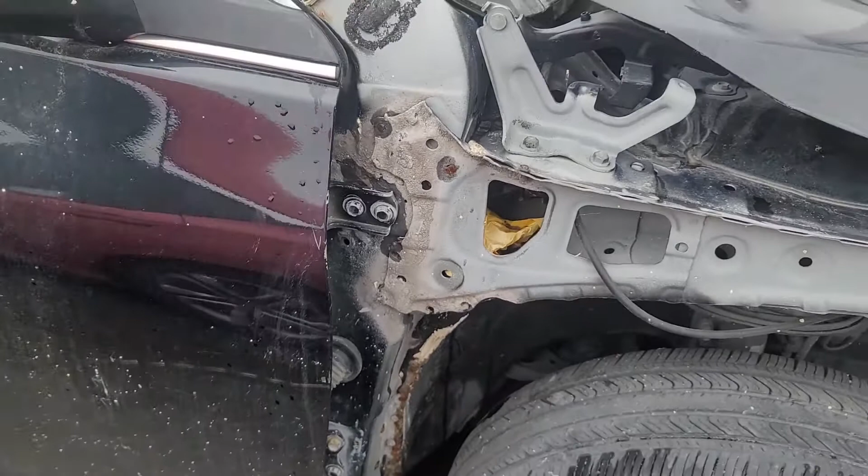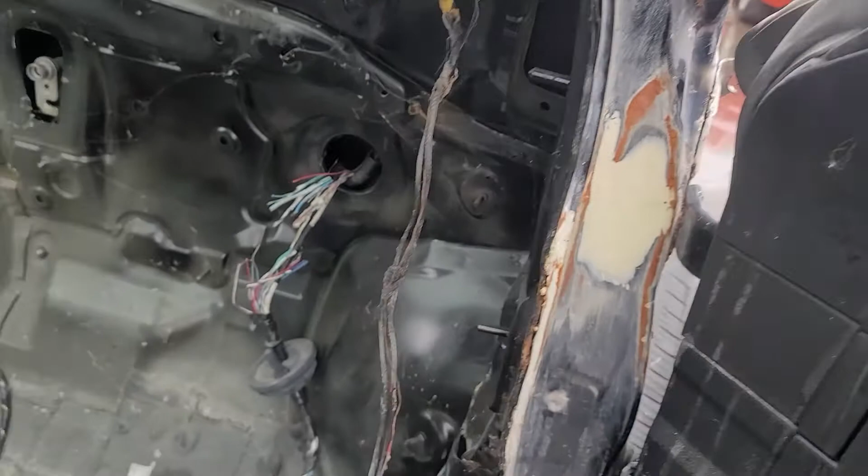Story behind this vehicle is it's a customer's car. It was sitting here for some body repair, and I'm not sure about what they did. They put filling, blah blah blah, and so they started welding, and all of a sudden the guy is welding. He did not notice that there is a fire inside the vehicle on this side. So what the fire did, it damaged the dashboard. It was under the glove box behind it, and it damaged the wiring harness. And we are here to repair the wiring harness.

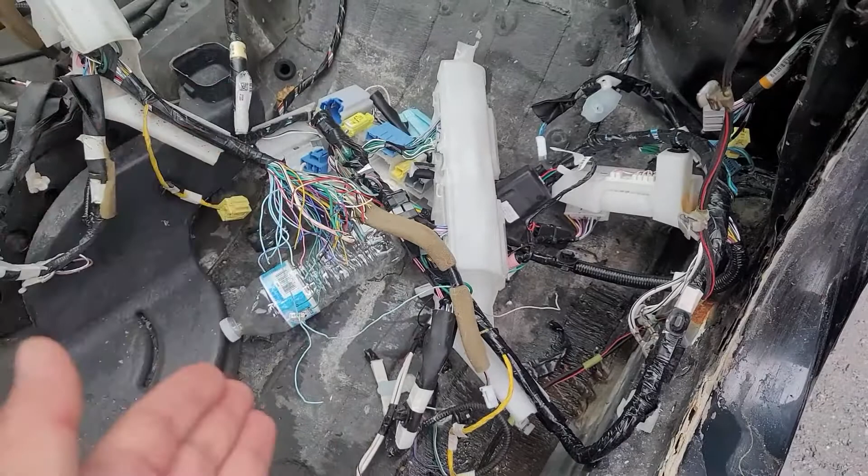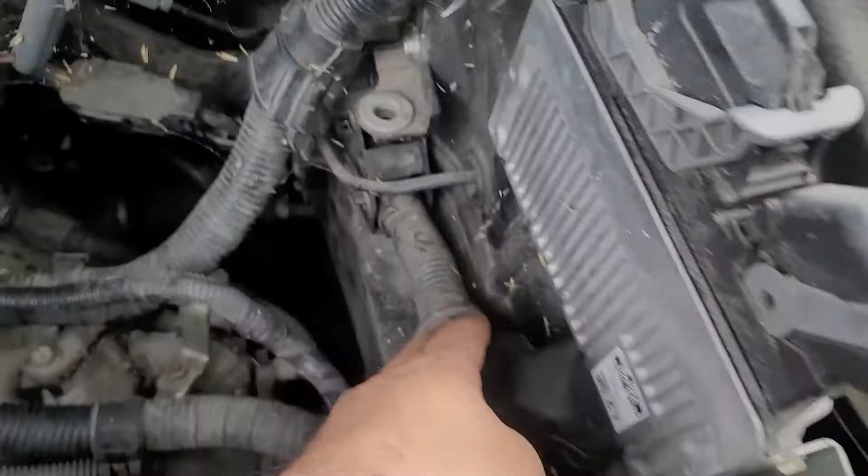They got this from the junkyard, but unfortunately when they got it, they also cut it. All they could have done is they bring the whole thing from under the fuse box here, and then goes over there and comes inside the vehicle from here and goes under behind the blower motor and all of that, and to the dashboard. But unfortunately he cut it, and he realized after that he did a mistake.

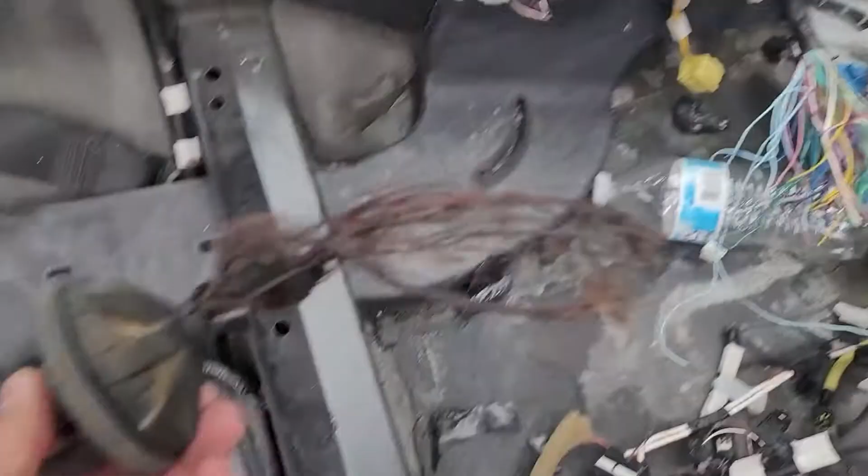It's not easy to find. It's a 16 and 17 only for some reason, and yeah. So this is the old one. See how it was. So we're going to fix this.

So I will share with you guys. I know this is really a boring job, but I will share with you guys how I'm going to do it, just in case one day you guys want to do it. And don't get me wrong, the payment is still good, but it's not gonna be compensating for the time. But again, this is still a job.

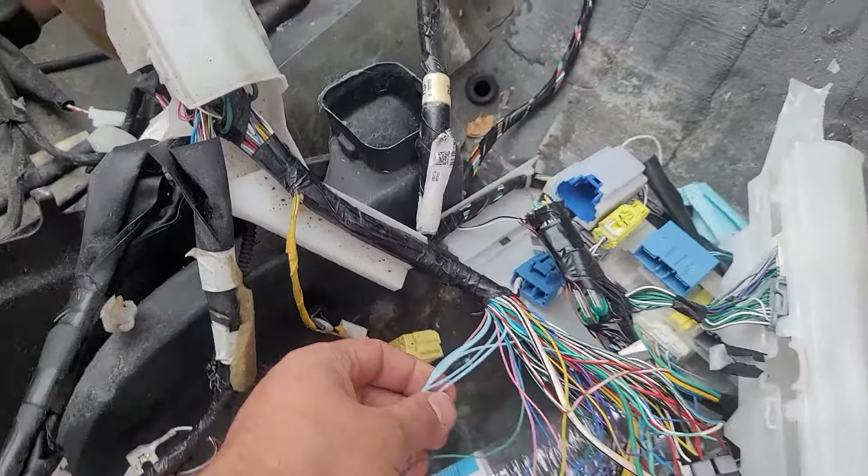I haven't done a job as big as this before, and if you think it's easy, no, it's not easy. For example, right here we have 2, 4, about 7 wires, the same color, same gauge, same everything. How do you know which one of these goes to the corresponding ones on this side? You don't. Same thing with reds and browns and blues. So it's not easy. It's definitely not easy to do, but I will do it.

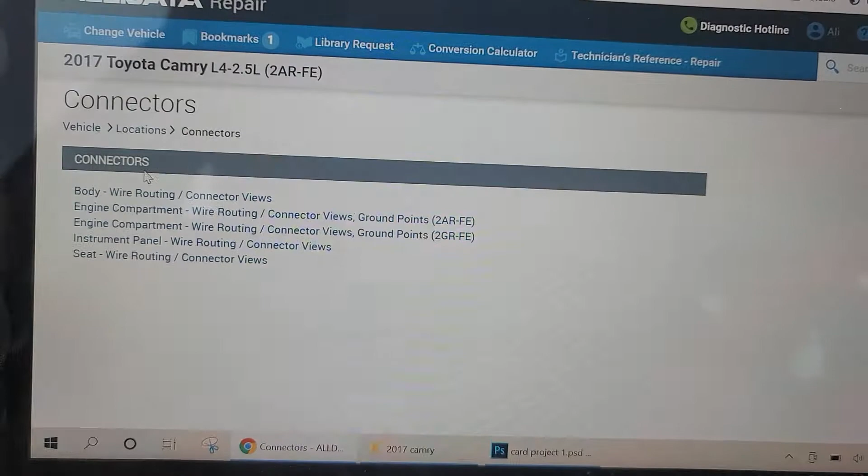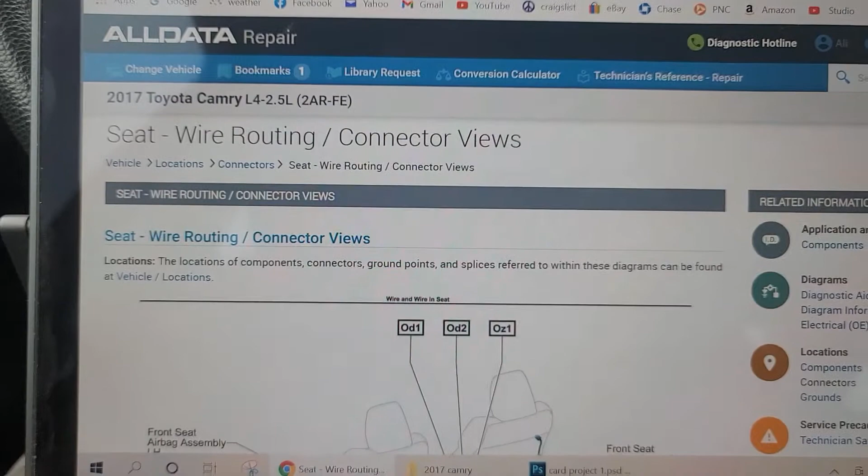My next step is I went to AllData and I went to connectors. So I started clicking on, let's say, the body, and I saved all these pages as PDF to print them. I am going to print all these connectors, routing, numbers and views, and take them with me inside the car, because I'm definitely gonna use them when I check continuity between 2 points to determine which wire goes to which.

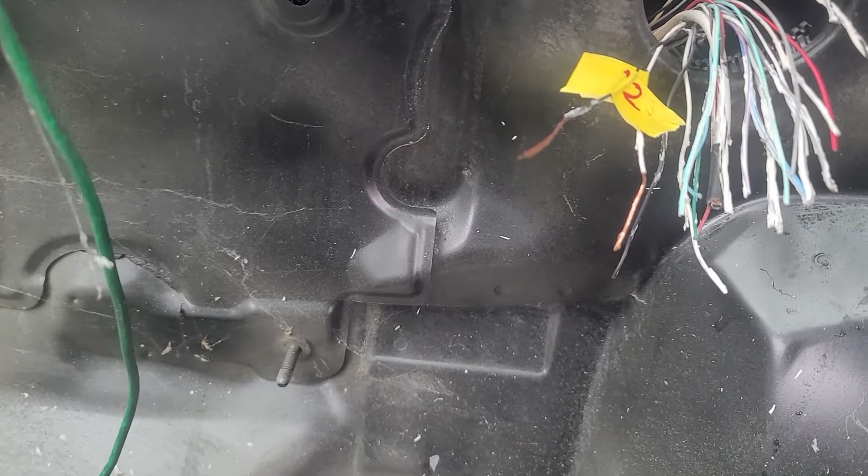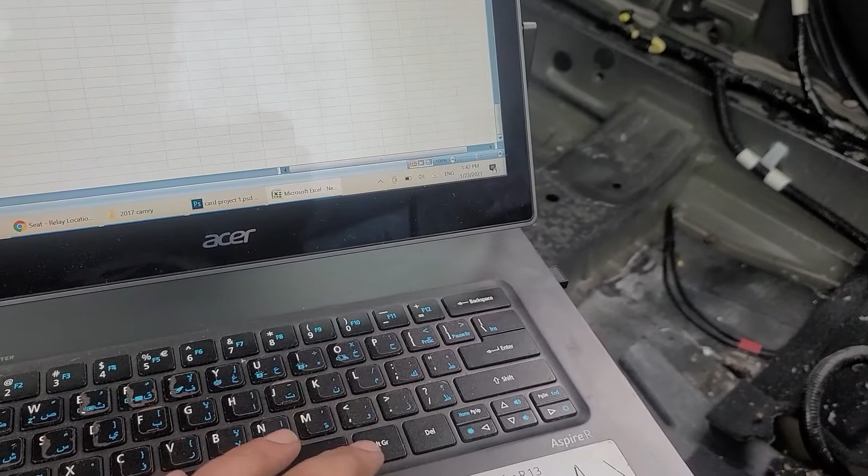Well, next we have to come inside the car, and what I did in the computer, I created an Excel sheet, and for now I'm using these columns: label number, color, start location, end location. So the label number is going to be a label I give to these wires. I use some masking tape with a marker and I label them.

Let's say this one is going to be label number 1, color white. Start location, that's when I'm going to use my ohm meter on continuity, and I'm going to hook this right here, and I'm going to go to the fuse box, and on the fuse box I'm going to check this line, where does it go to, which fuse, and by finding that fuse I go back to the computer, pull up the wiring diagram, see where this end should go to.

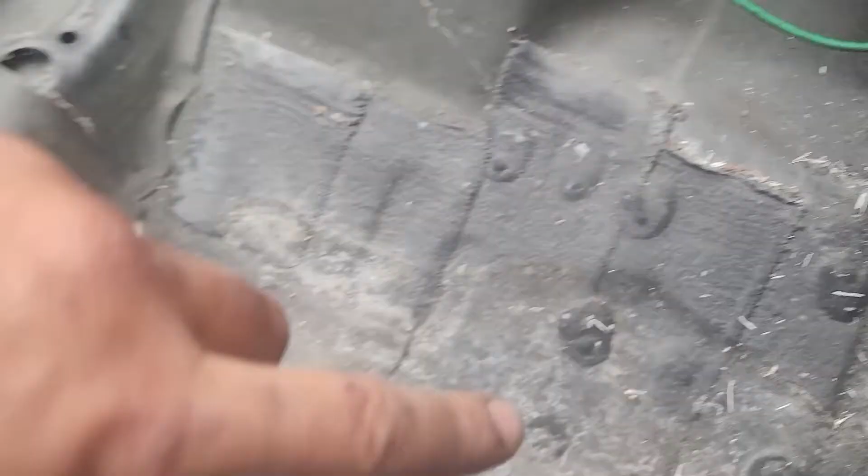So from here to... actually from here to... where's that piece? Right here. So from here to here, and it should go right to one of these harnesses that we already pulled the pin out for them, and I'm going to print and bring with me here in the car for faster access, faster checking.

Here's something that I learned today, and it was really helpful for me. You see how these wires are twisted? So when it's twisted, there's an indication that they might go to the same location.

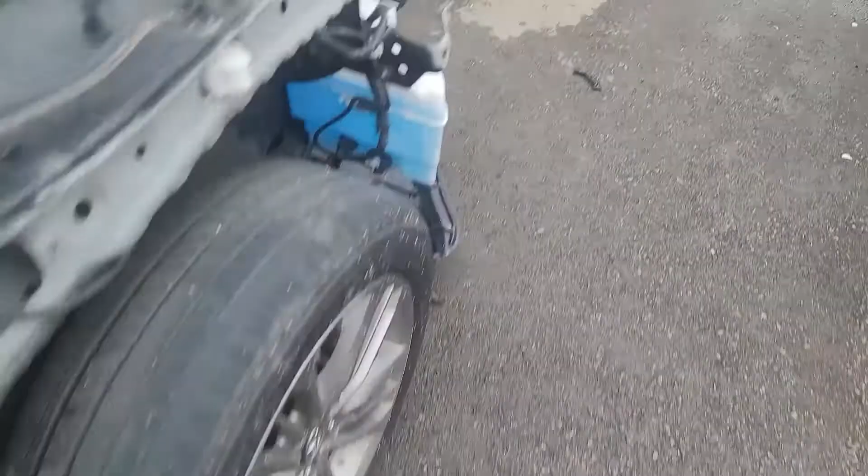So I was gonna use this, and let's start with 1. Now what I did, I went over there, and I took this off, took the bottom off out of the way to have a better access to these wires. So basically these 2 harnesses, one for the engine, the big one is for the engine, and the small one is the one that goes to the car.

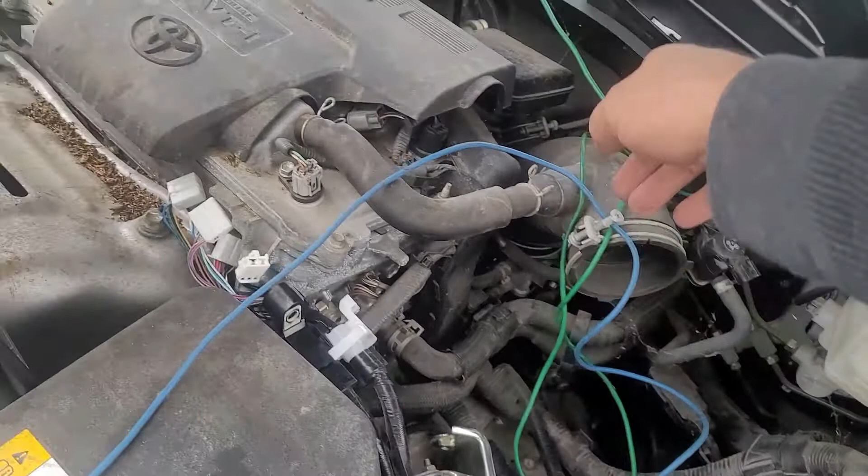At the same time, these wires, they go from the fuse box, they go this way, they branch to inside the car from here, and they branch in there, and some of them go over there.

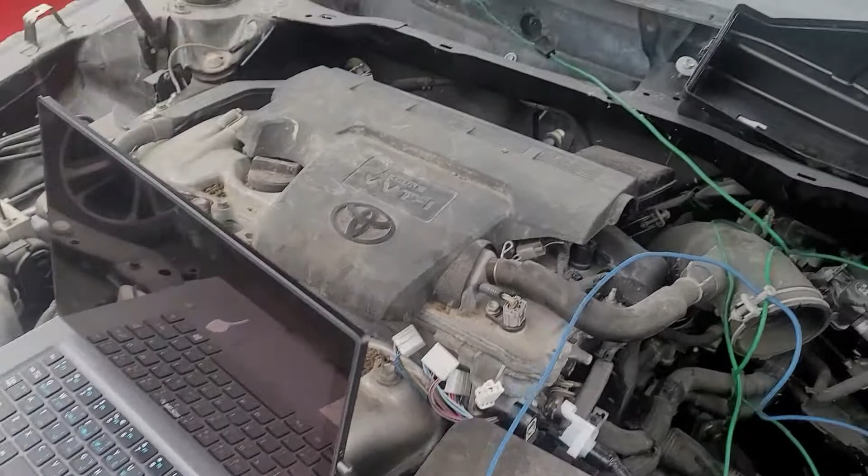Now looking at these black and white twisted wires, what could be coming from the car to the outside, to the inside, sorry. But what happened is, look, I found them here, twisted, but I checked every white wire here, I couldn't find anything. It was crazy, I couldn't find anything.

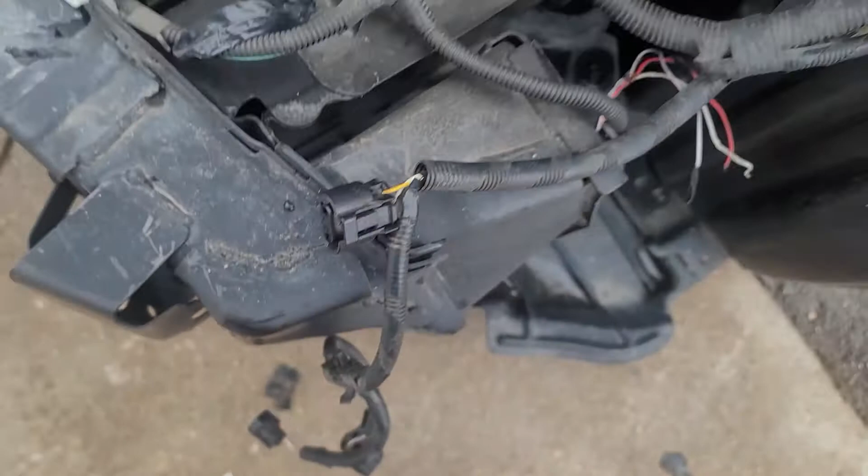But what I noticed, some of these wires, they go straight here outside, and they branch also here, so that makes my life with this car worse. And then I thought about it, I'm like, okay, what could be coming from inside the car straight to the outside without going to the fuse box or to the computer?

And I couldn't think of anything other than the airbag. So I went to the computer and I pulled the airbag diagram. And guess what? They are black and white, black and white. And these are the front airbag sensor, front airbag, left and right.

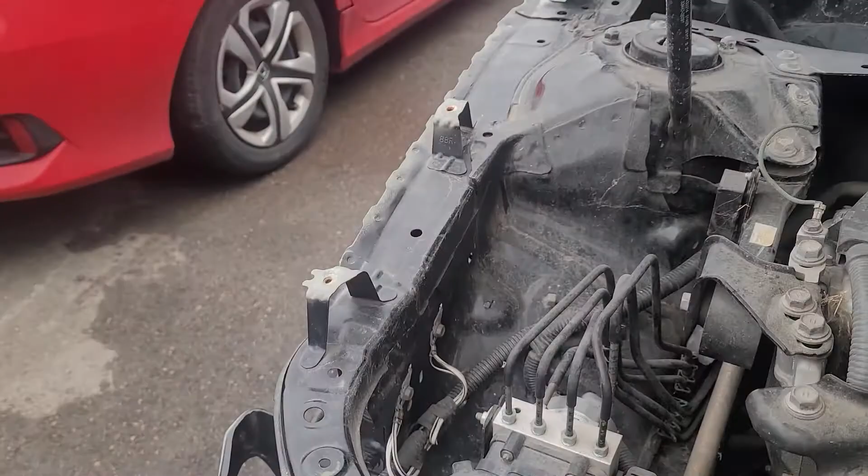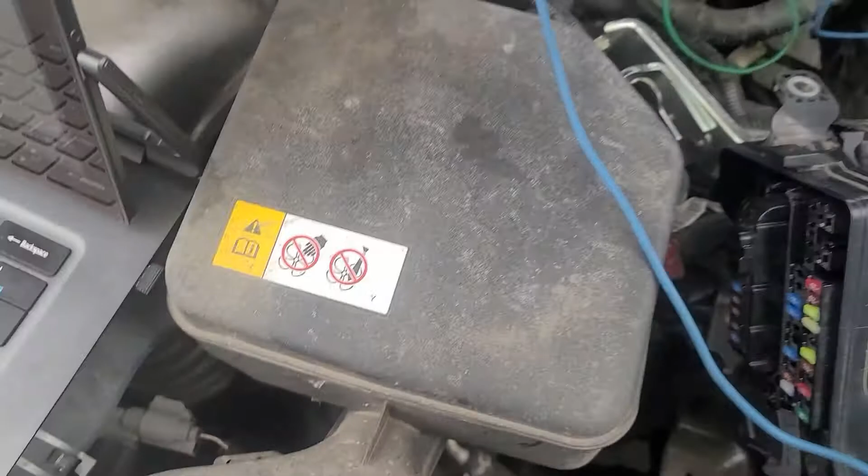So what I did, I came with my probe and I disconnected this and I checked here and I didn't have no signal, which this one is the same one that come here. But I was like, okay, then how about the other side, the passenger? I don't see any wire come from here, so it gotta be the one that branches from there and come in here, come into this.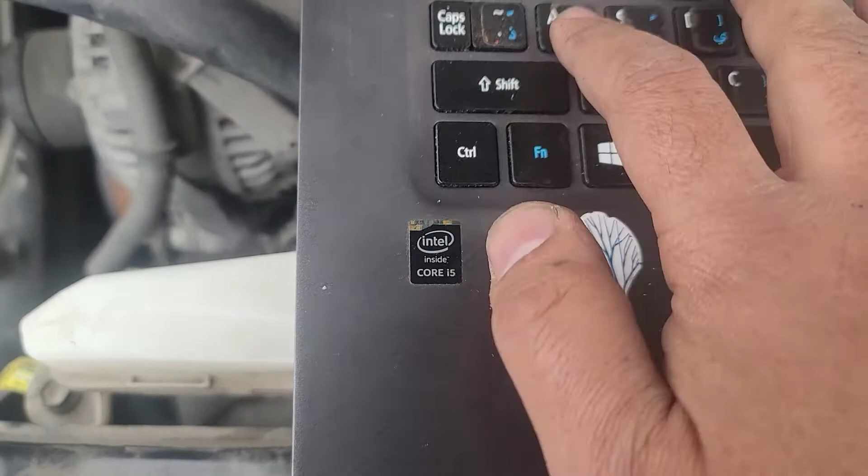Label number 1, color white. Start location, it depends on how you look at it, but for me, I'm gonna look at it outside to inside always. And start location is right hand crash sensor. End location, so right hand crash sensor, that's right here.

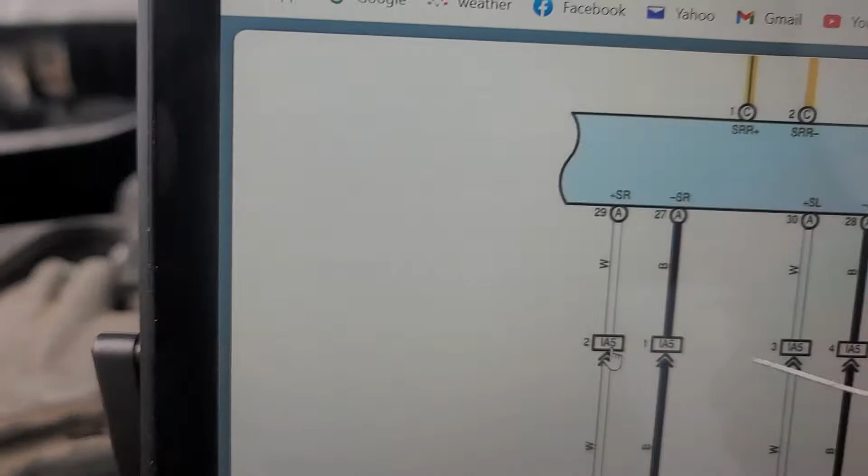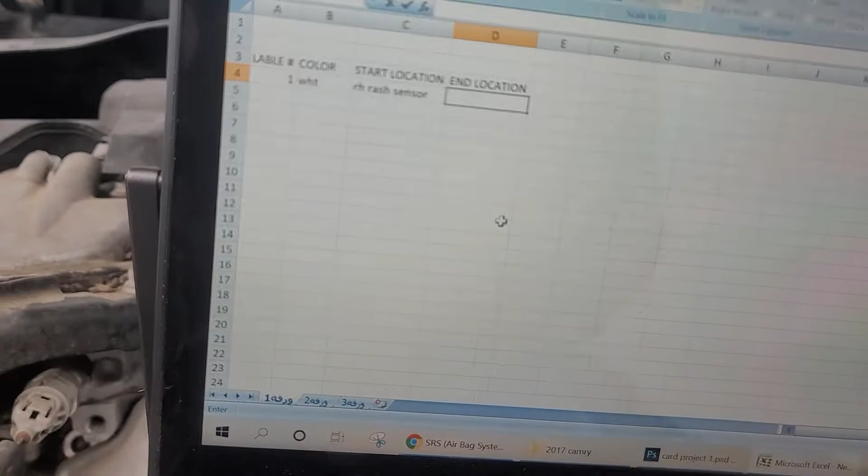Black one, sorry, the white one would be pin number 2 going to this connector right here. This is really important, I looked at it earlier. IA5 pin number 2. I'm gonna say IA5 pin 2 right here. CIA5 pin 2.

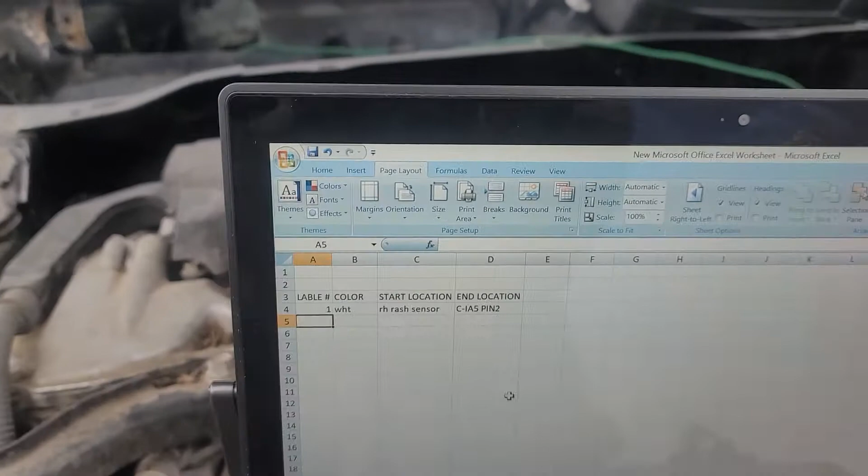Second was black one, black right hand sensor, C pin number 1, I think. Definitely is pin number 1, right? Yes, pin number 1.

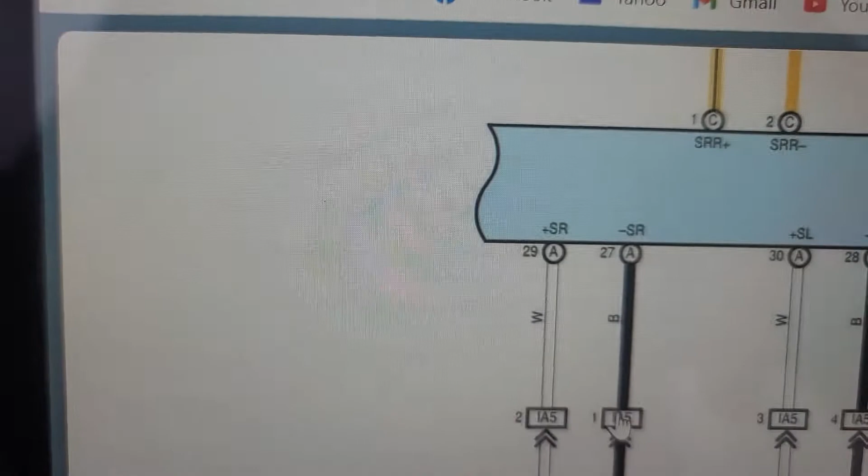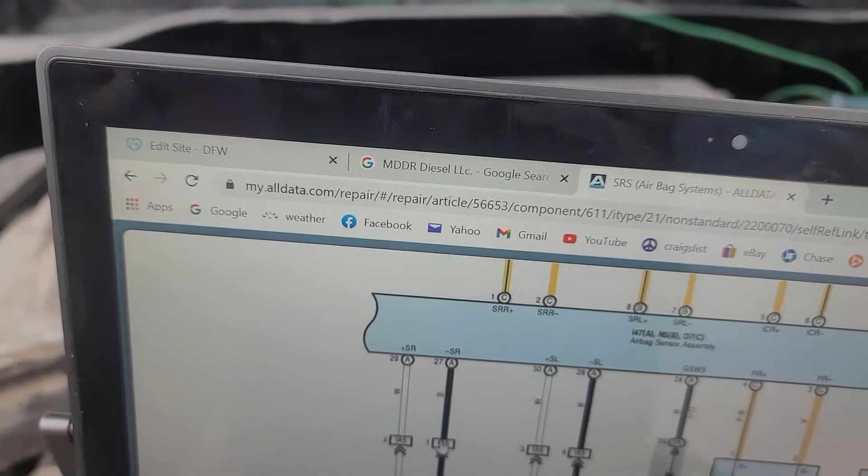Now I'm thinking of adding another column so I can add the final destination, because remember we have 2 cuts. So some of them are going to be already good, but others, I think if I'm not mistaken, I think this goes to here and this goes all of it. You know what, I don't think I need to. Well, I have the diagram out anyway. I don't want to go back to them again, but this comes to this junction right here. IA5 is going to be one of these, and then from here I will branch to this big one right here that's going to be connected to this end.

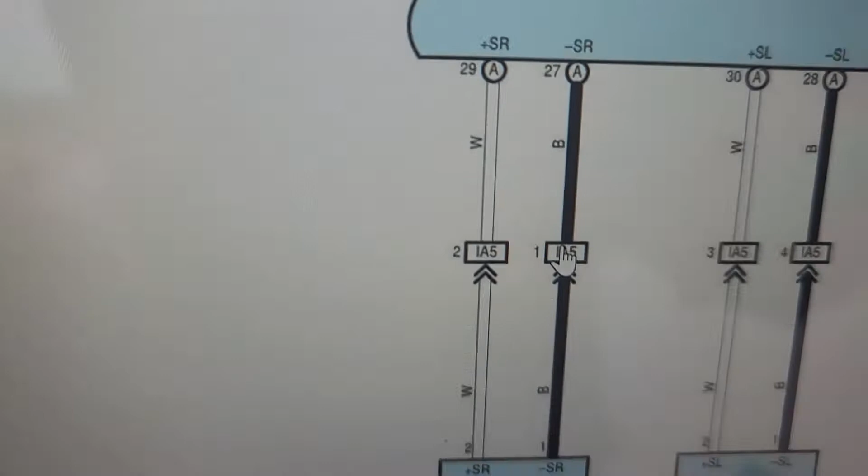So yeah, let me put it. It's going to make my job easier. And from IA5 is going to... but here's the problem. When it says here, I don't know which one of these connectors, airbag connectors, this will be.

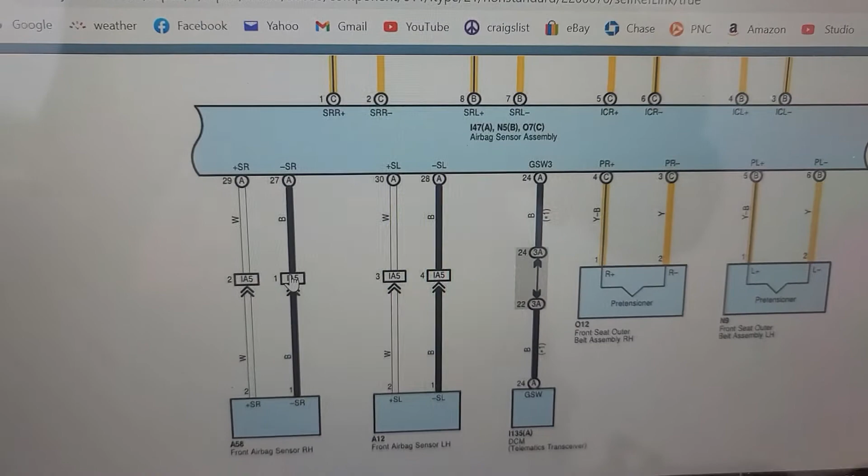Should I write which diagram I found it when I go back to it? I don't know, we'll see. But this is basically how I'm going to do things.

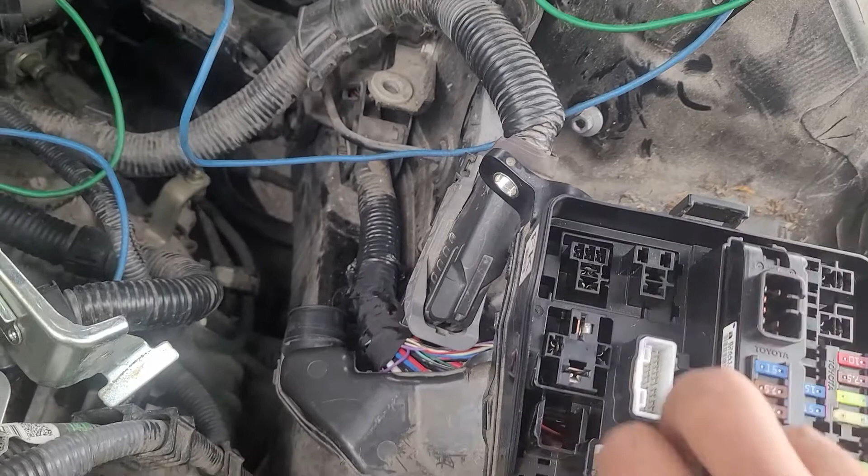That number 1 drove me crazy, because what I did, I checked these, I opened the relays, checked the pins, the harnesses, I took them off, I checked the harness for the computer, nothing. And I checked, that's when I decided to open this here, and I opened it, I checked all these black and white, and nothing. But hey, you learn something every day, and this is how I learned it, the hard way, but it's gonna stick forever.

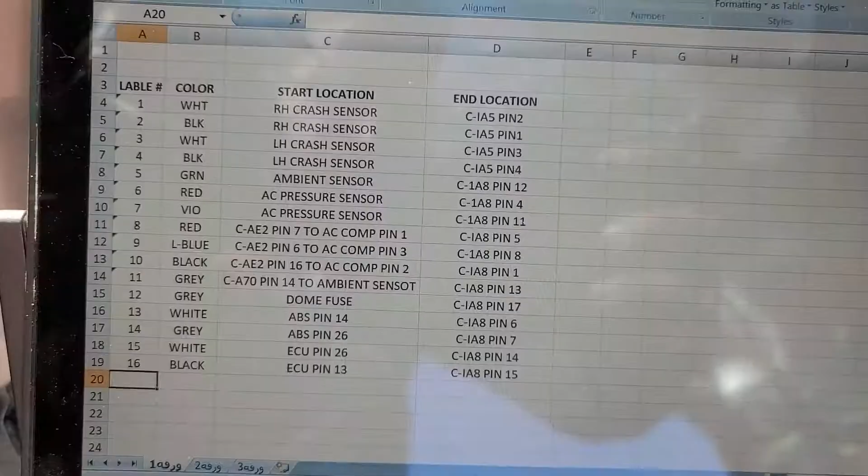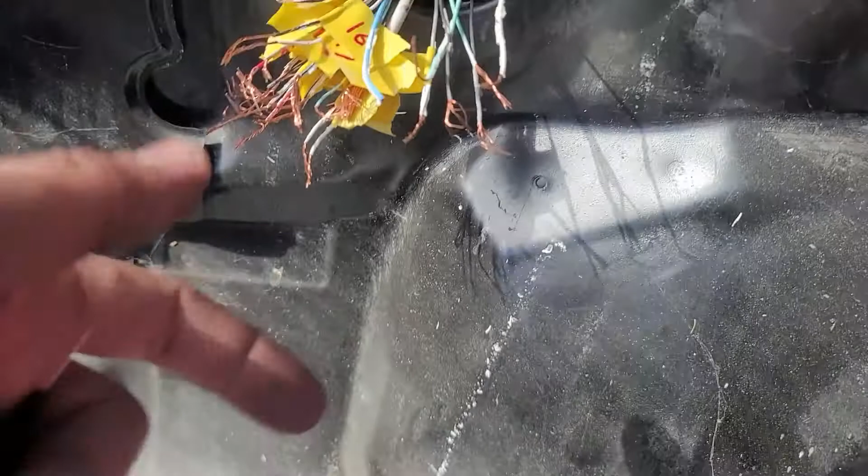Well, just to get you guys with me, I'm almost done with this first piece, and so far I got 16 of the most common ones. I am left with these two light blue, one gray, one white, and one black. All I can do is when I have the extra ones on this side, I will find out where they go to here in this harness, and then I'll be able to pull up the wiring diagram for them.

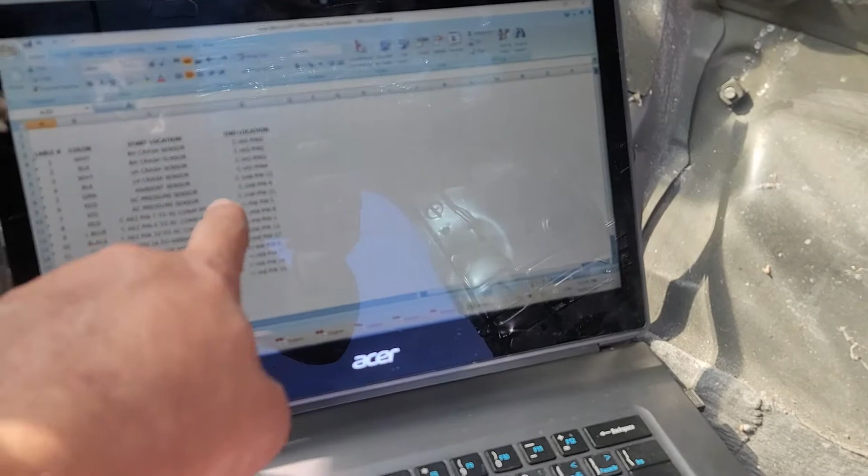Because here I'm limited. Over there by the engine there's a lot of components, the ECU, the ABS, the lights, the sensors, the airbag sensors, although I checked most of these major circuits, but yeah, I forgot to do it this way is better. So every time I finish one, I label it, write what it is, where it's going to, what's the other pin. So what I'm going to do right now, I'm gonna go one by one.

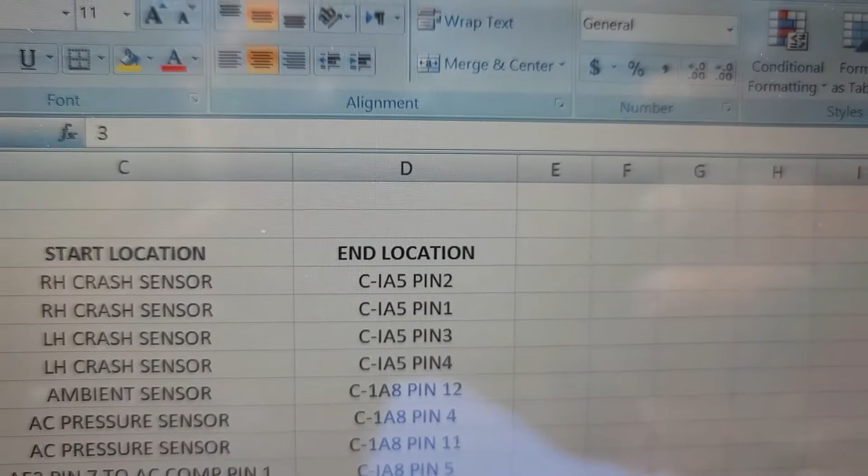Pin number 1, I'm gonna find out C1, connector IA5, pin 2, and when I find it here, I find out the corresponding wire here, and I connect it to number 1. That's how it's gonna be.

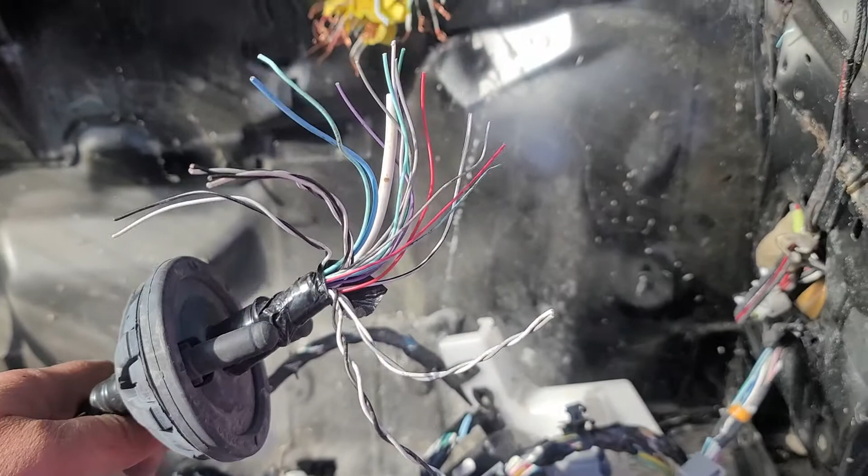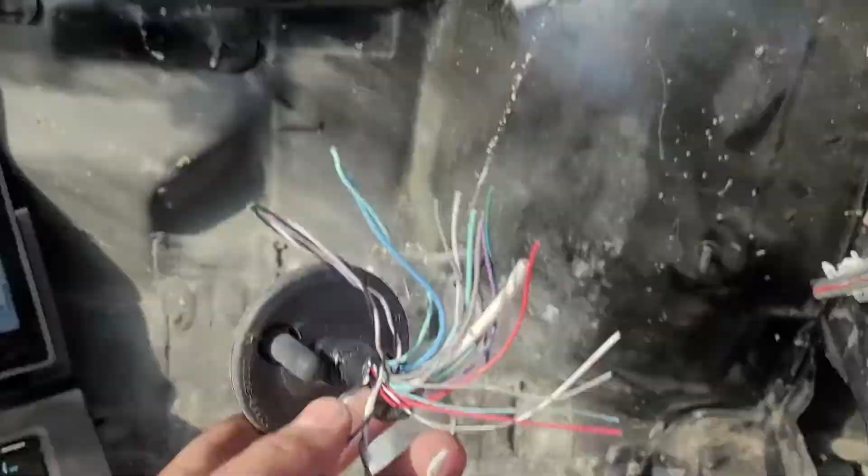So here I'm dealing with the two harnesses. This is the IA8, this is IA5. I have 4 here, and the rest are all of them here. So I'm going to check continuity between these pins with this end, and then decide which one goes to which based on my diagram. You guys can take screenshots or something if interested.

We are done with this harness, and now we're going to move to part 2. It's gonna be fun. This is a bigger one, and it has more common colors and more harnesses here to deal with, so this one is gonna take me longer than this one took me.

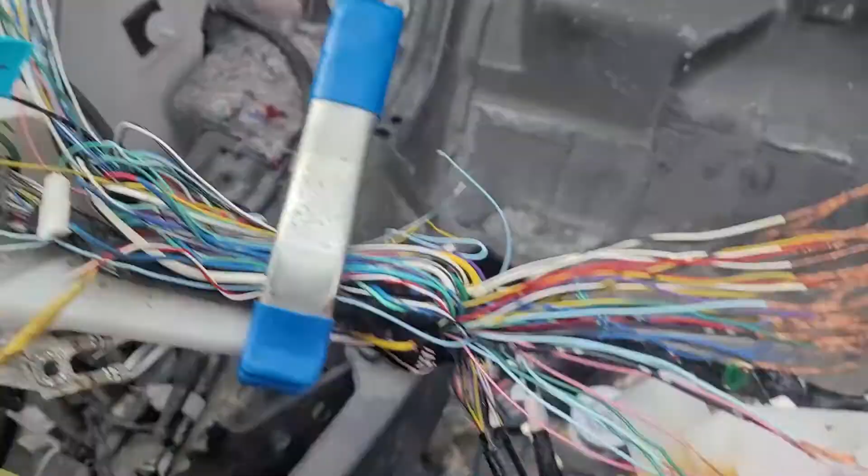I want to share with you guys the technique that I'm gonna use for this harness. I chose one wire. Again, using the ohm meter continuity, I hooked up one lead here, and I started searching for the same color, and I found it in that harness.

So from that harness number, which I actually traced on the other end, I went to the passenger rear door. So I went to the computer, and I pulled up the passenger rear door, and I found out that that black wire is coming to this harness, which is IO2, and I labeled it, and it goes to the junction box on the driver's side to a harness B.

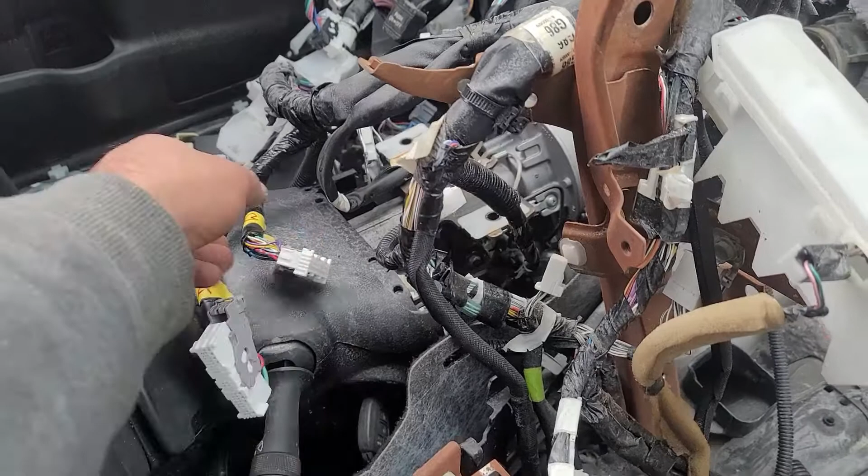I pulled that wiring diagram, and I found out the harness, and from here, from the known good pin here, I am going to know which is the wire corresponding to that pin over there, which is going to be the same one.

I'm not gonna wire them right yet because they want to put some stuff. They said they had to install a couple of pieces before I'd be able to do my thing. But so what I did here, I used the logic and common sense.

Like what? The wires that don't have similar gauge or color. Yeah, the wires that don't share same gauge or color, I fold them and I put them here for later. It's gonna be easier to do, but I'm more concerned about these that are the same thickness and the exact same color.

Those are the ones that I'm gonna be careful with. The other ones are gonna be easier to find because they are unique, one of a kind, either because of the gauge, the trace on them, or the color itself. So that's how I'm gonna do it.

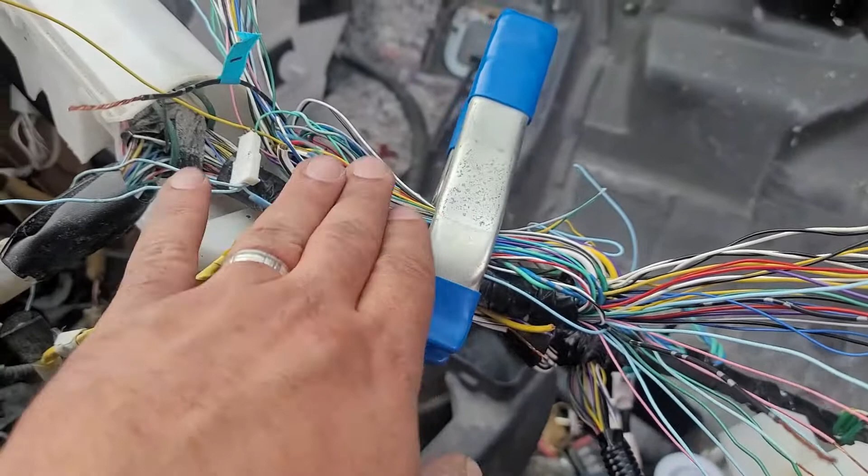I'm gonna focus on these first, and then switch to the other ones. And I think when I find the harnesses and label all of them where they go to, it's gonna make it way easier to find these ones right here.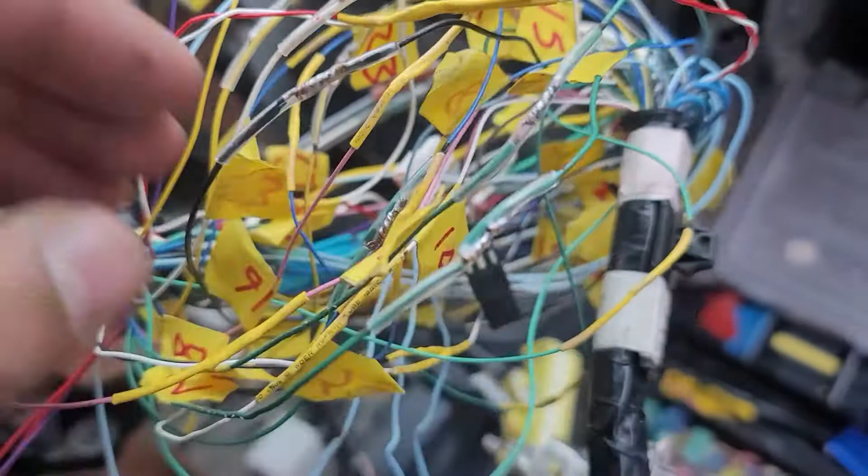Alright, I'm almost done with this harness, this side. What I did, for the big ones, I used these connectors, and I'm gonna tape them. For the most common ones, I use this clear shrink, because it's thicker than the black one that I have.

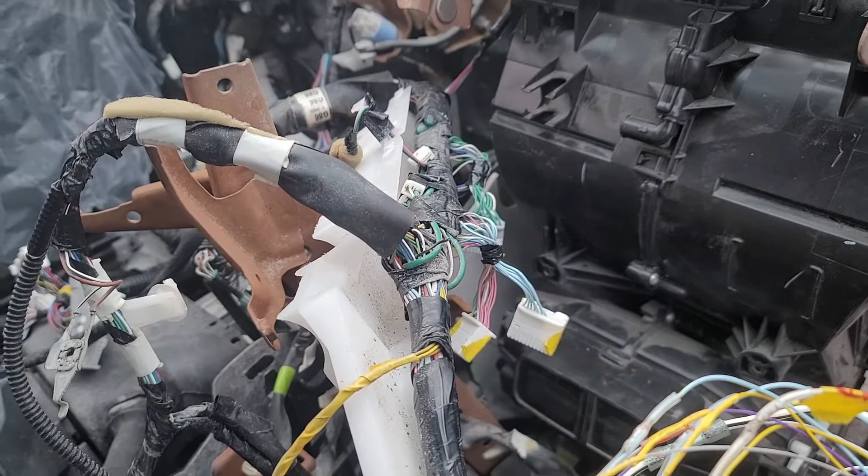What we're gonna do is hook everything up before we put the dashboard back, give it a key on, scan the car, delete everything, cycle the key, and see if we have any codes or cut wires we need to fix. It's easier to do it while it's like that, after we make sure everything is properly hooked up and no fuses are blown. Then I'll give the okay to put everything together. But this is how we're gonna do it.

I'm left with 4 wires on the original side, dead at the other end, because when they brought this harness, it didn't have those wires. So I came to the old one - this is the brand new one, that's why it's good to always have it.

Let's say, for example, this green one, the thick one - I traced it and it comes to this harness. So this harness, the original one, clips to this original one. And if you see, this is the pin right here, but on the other end it doesn't have a wire. That means this is dead.

So what I did, I just crimped it right here. The other one's the same thing. I use this just in case me or somebody in the future needs them, so I have them and can shove whatever wire I want and crimp it. For the smaller ones, I use this yellow shrink because I don't have a clear one, and I didn't want to use this thick big one because it would not fit correctly.

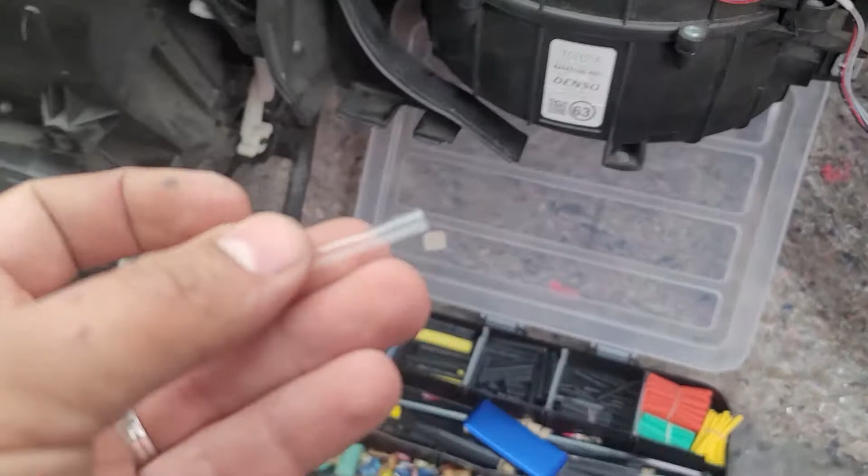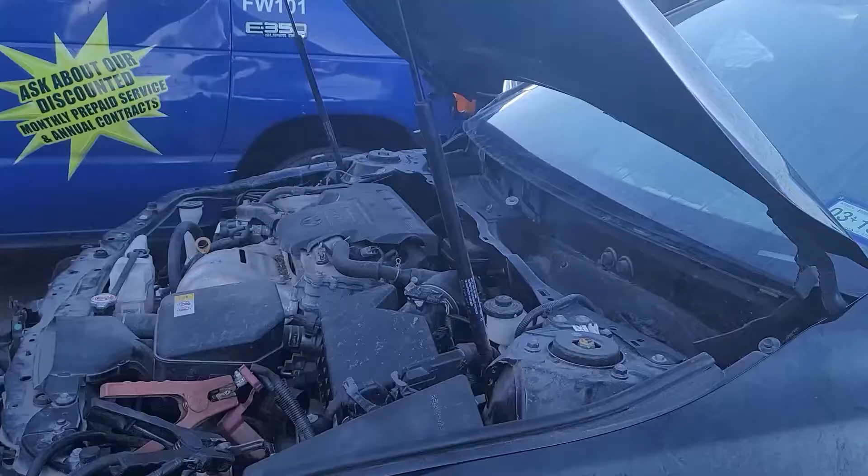So after we make sure everything's okay, I'm gonna tape everything together and show you guys the results. So this is the first time we start the vehicle after a year and a half of finishing the harness.

Alright, security light is off. ABS light is off. Airbag is on, of course. Brake light is off. Check electric power steering system - we have to check that.

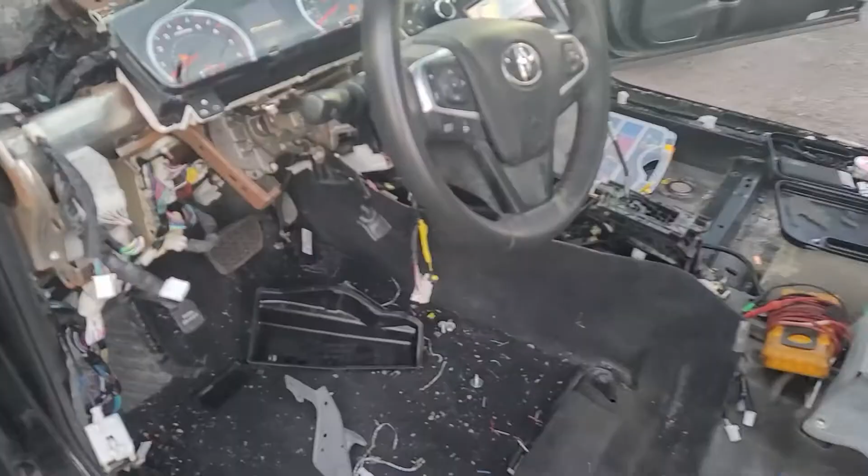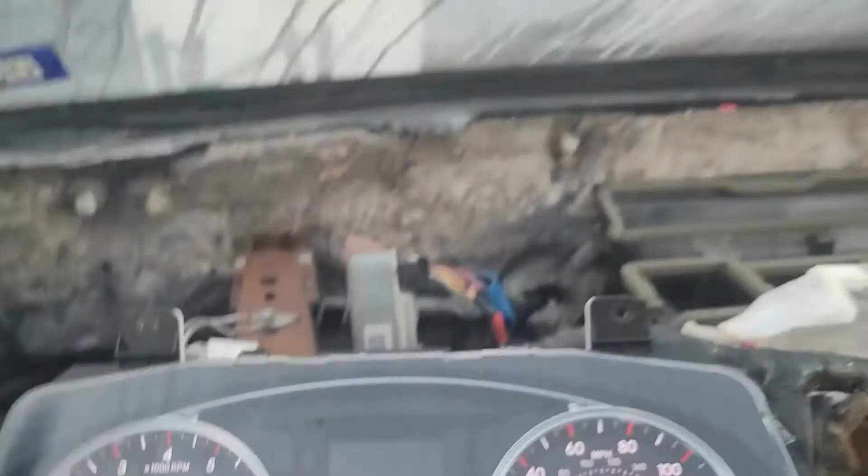Here's a bonus footage for you guys. I know we left the last clip with the power steering message, but now it's fixed. It turned out this harness was unplugged, which feeds power to this number 1 red wire that comes from that 7.5 fuse under here, which was good.

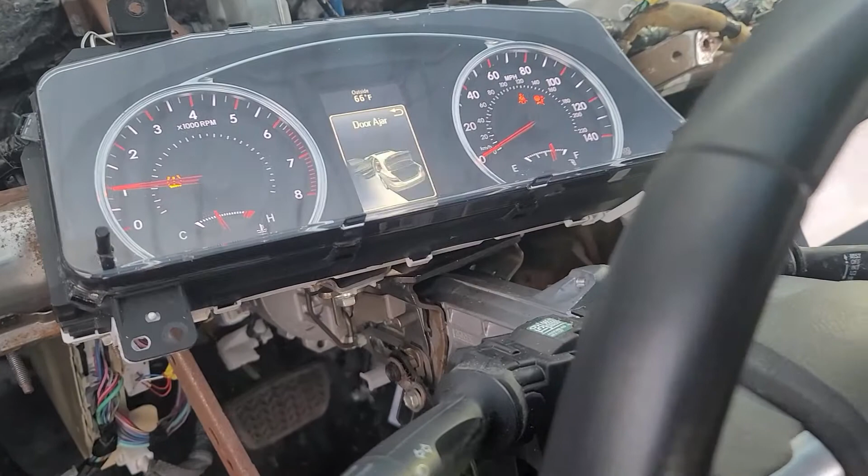The blower motor doesn't work, and the reason why is because that line is hot all the time. So when the wire melted, that 50 amp fuse blew. So I took it off and gave it to the owner - he needs one. But other than the airbag system, everything should be good in this vehicle.

Sorry, after the first time we started it, we found 5 blown fuses from the fire. It was a long trip with this vehicle, but worth it. I learned a lot about Toyota's wiring system, and that was the main reason why I took this job. Definitely the payment does not match the effort, but when it comes with a learning lesson, money is not always first to me. Thank you guys for watching.